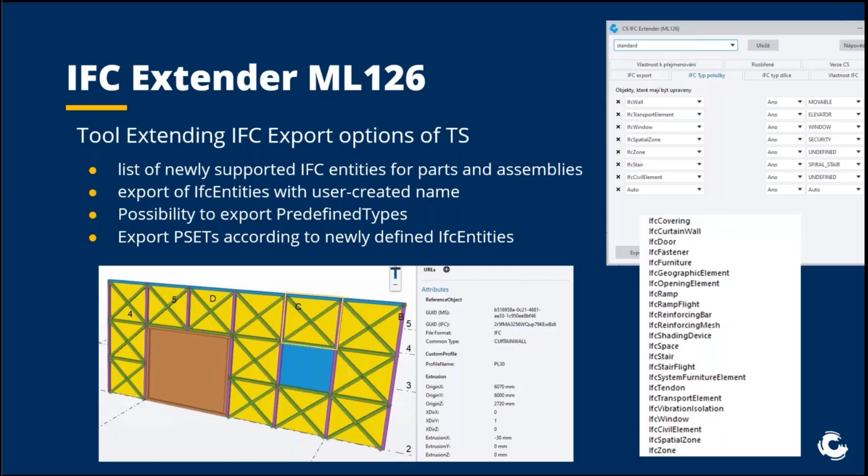In the second part of my presentation, I will show you three tools we made to help our customers with this, with BIM implementation. The first is IFC Extender ML126, which extends the current IFC export of Tekla Structures. It offers a list of newly supported IFC entities for parts and assemblies, beyond the list already offered by Tekla. It offers the possibility to export predefined types, exporting property sets according to newly defined IFC entities, and so on. I'll show you in a second.

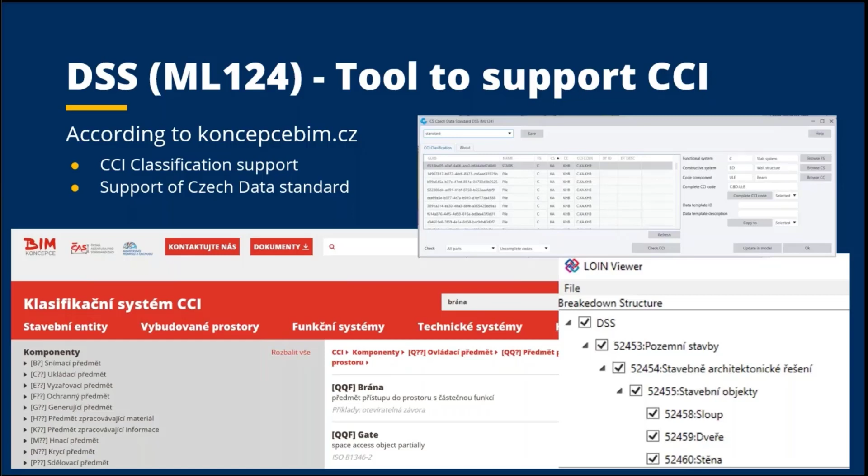The second tool is DSS, a tool originally made for the Czech market, but because it's made based on an easily editable Excel file coming from CCI classification, it's easy to adapt for different countries using CCI classification as well. This tool helps the automation process in filling in CCI codes. It whispers the codes for you, so you don't need to remember all of them, and it checks if all the objects in the model are classified.

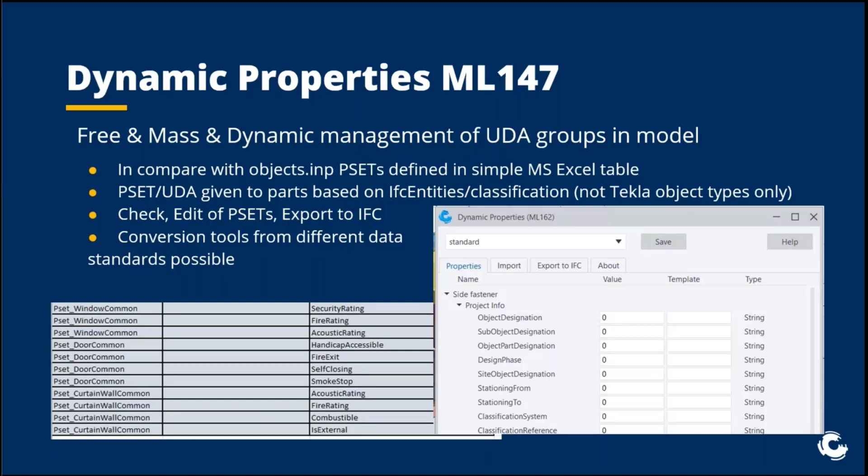The last tool I will show you is Dynamic Properties ML147. It's really powerful if you like to freely and massively work or handle dynamic properties in UDA in the Tekla model, compared to objects.inp as Tekla users know it. This is really dynamic and flexible, and you can easily set up your data standard in a Microsoft Excel table, or create a link from any data standard on the market to your Excel file, and then use it in Tekla Structures. You can even categorize your entities in the Tekla model, not based only on Tekla model objects like beam, column, panel, and so on, but using whatever number of categories you like and your format requires. Then you can again check, edit, and export this data to IFC and extend your model. I'll show you this now live in Tekla Structures.

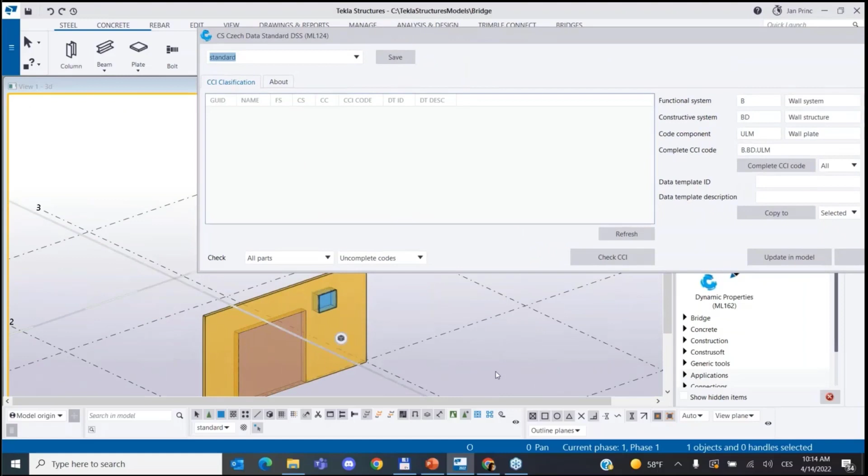Starting with CCI classification, Czech data standard. You see I have a simple model just for this presentation. In this model there is a simple bridge and a simple wall. I will start the Czech data standard tool, check for all CCI codes, and you see I have plenty of objects in there, just three of them are classified.

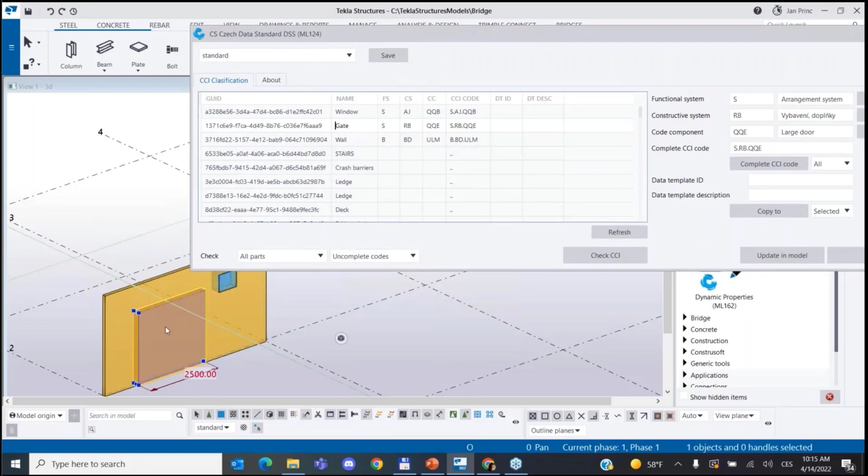These are the 3 objects: the door, window, and the wall. I can highlight any of the objects, check if it's really the object I'd like to show, and then I can fill in the CCI code.

The CCI code consists of functional system, constructive system, and code component. Here is the complete CCI code of the component. If I'm not satisfied with the code, I can browse for it.

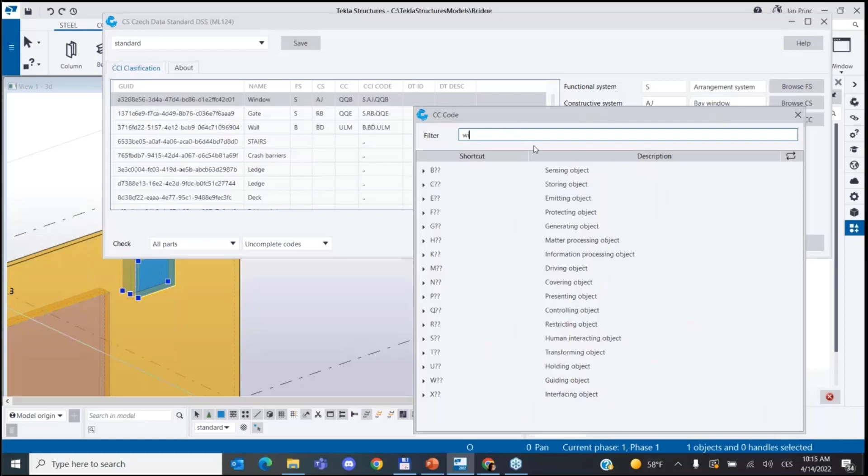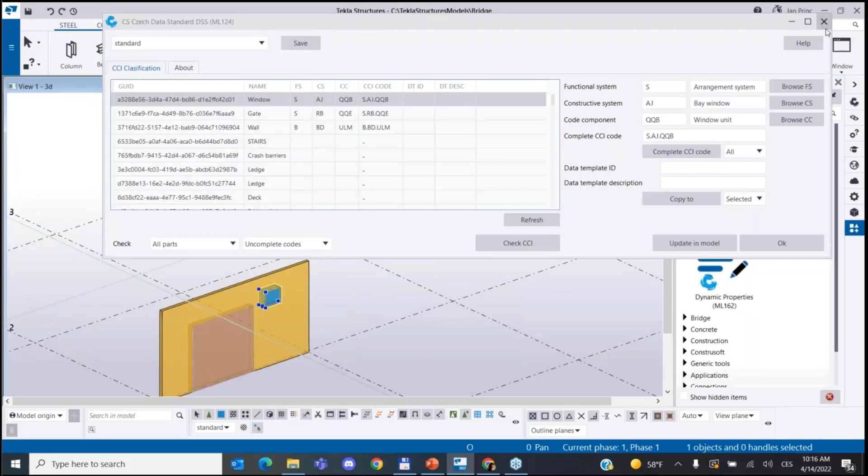I can filter by writing the first 3 letters and choose from the list which window I'd like to put in. Then I can complete the CCI code, copy it to selected objects, update in model, and the model is updated. Later, I can check only for uncompleted codes, see what's not filled in, and make it ready for finalizing your model.

When my model is classified, I can use IFC extender. IFC extender looks similar to IFC export, but there are a lot of new functions helping with the IFC export, making your exported model even more rich.

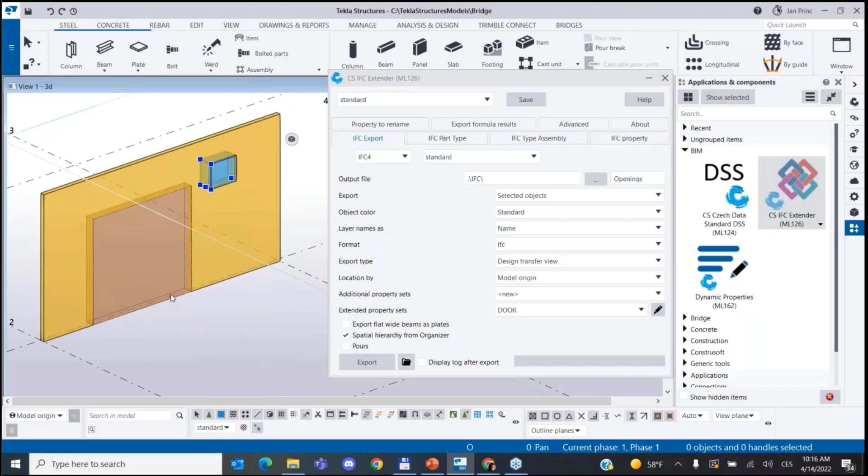The most important thing is that you can define your IFC entity and subtype. You have it in Tekla 2022, you have it here now, but we have our own categorization here. So here you can select that this is in fact a wall object of Tekla Structures, but we like to export it as IFC door with subtype or predefined type gate.

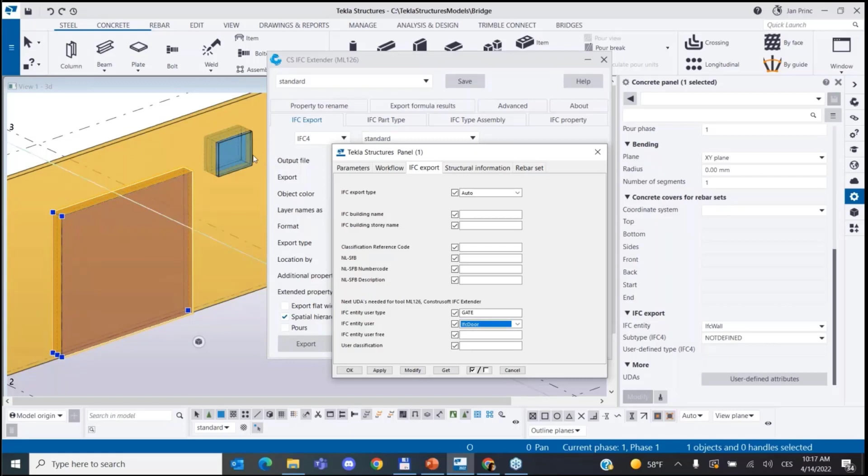And here we have a window, which I've, just for the case of this presentation, created as a user-defined entity, so it will be exported as an object with this IFC entity - so it's IFC window. The same thing you can do for assemblies and so on.

These extra IFC entities you can extend with extended property sets. So I will export for IFC door and IFC window. I will export the CCI code and other opening properties just for this presentation.

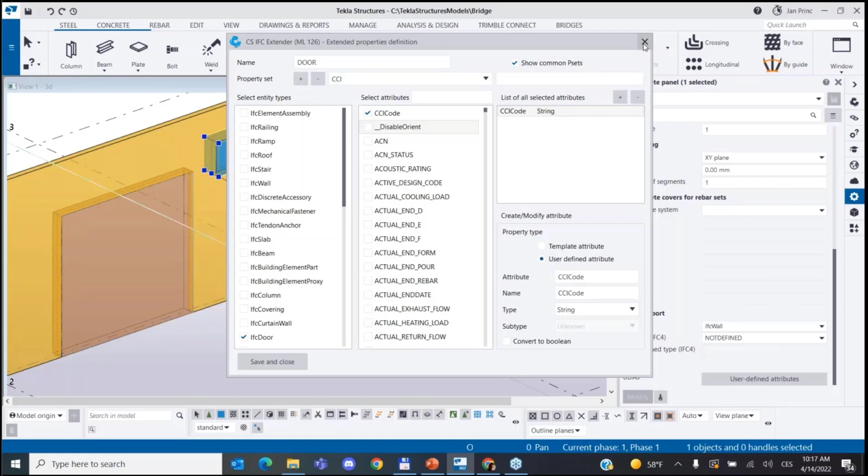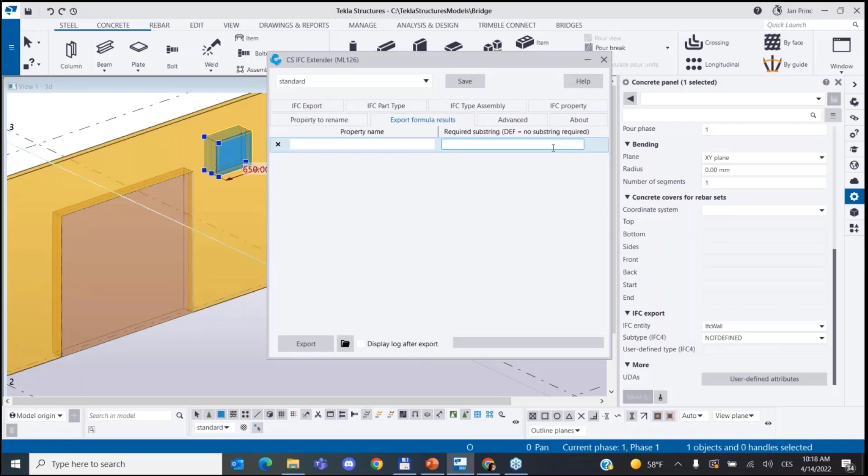In IFC extender, if I'd like to, I could define predefined types for different objects, or export IFC properties as a result of a formula, like you know from template editor. So if I go to IFC export, I will just select these 3 and export them.

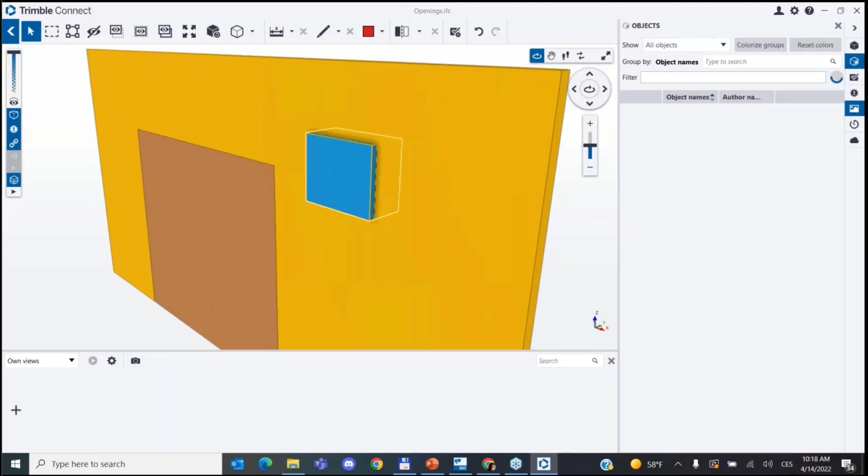Check for the file in Trimble Connect. And in there, you shall see that it's IFC window type, not defined subtype, and I have exported the CCI code as we defined in the model.

And a special property set for openings, and the same in case of IFC door type, which is subtype gate.

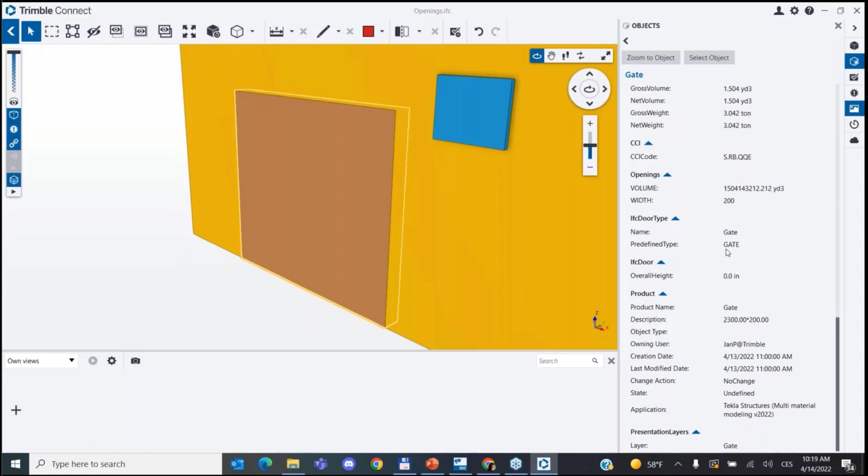If I go back to Tekla Structures, I will show you the last tool I'd like to show you today, and that's dynamic properties. Dynamic properties is based on a simple Excel file, as I mentioned before.

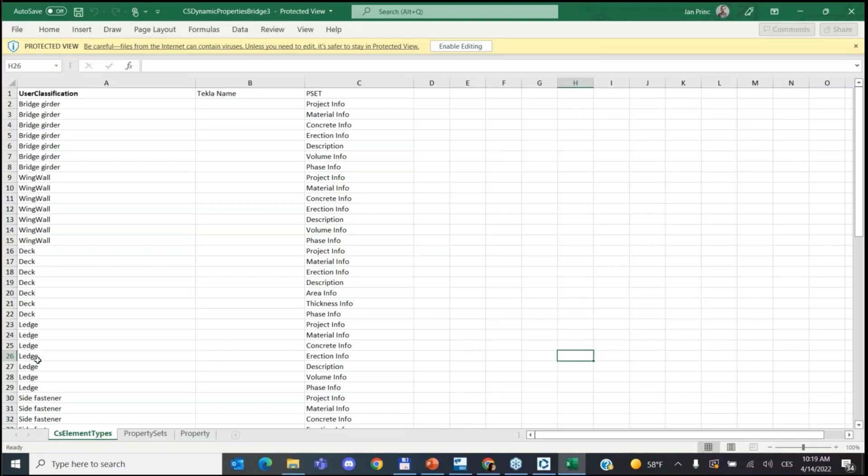I'll just show you for a second. It's an Excel file consisting of 3 sheets: element types, property sets, and properties. So here I have all the element types and the property sets linked to them. Here, for each property set, I have the list of all properties.

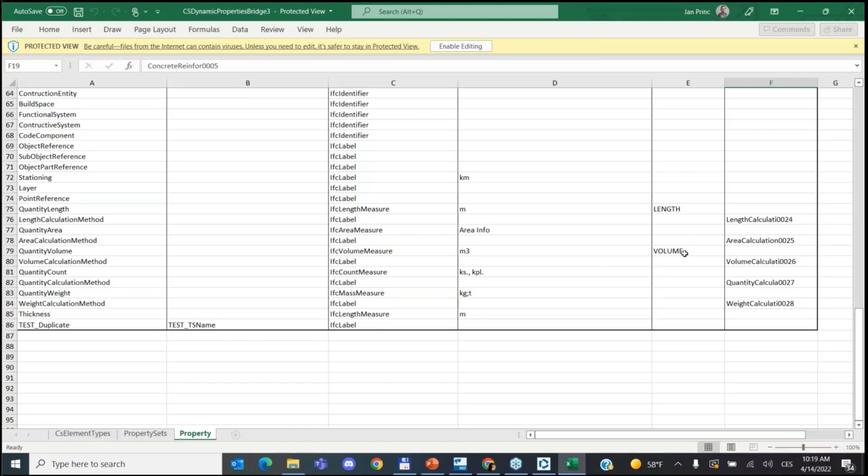I have the list of properties and their types and subtypes, and even - there are only 2 here, but in practice most of the properties will be filled automatically based on the result of formulas, like you know from template editor. So you don't need to fill in all the values manually. That's the plan, that's how the tool should help.

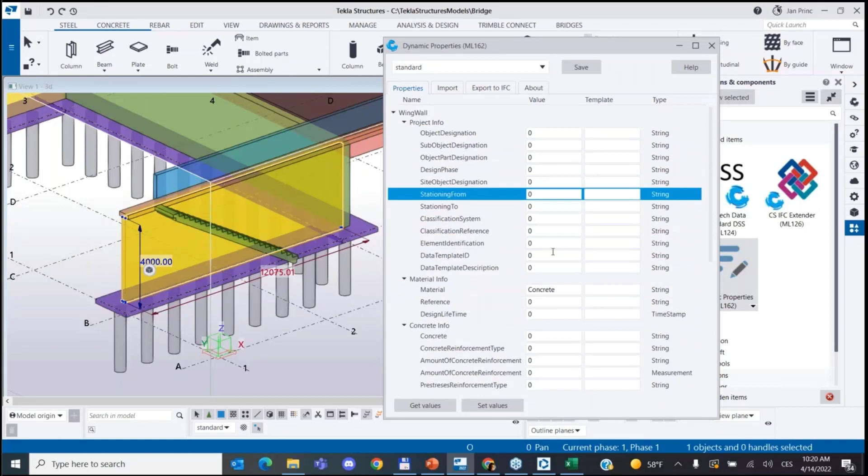So if I start dynamic properties, you can see I have here a column, but in my categorization it's a pile, so it has these UDAs offered to the user. Here I have a wall, and this wall is categorized as wing wall, so it has these UDAs, and there's another wall which is categorized as crash barrier, so it has again different UDAs.

I can fill in these UDAs for more objects at once, set these UDAs, it's written to the model, and then I can export these values to IFC.

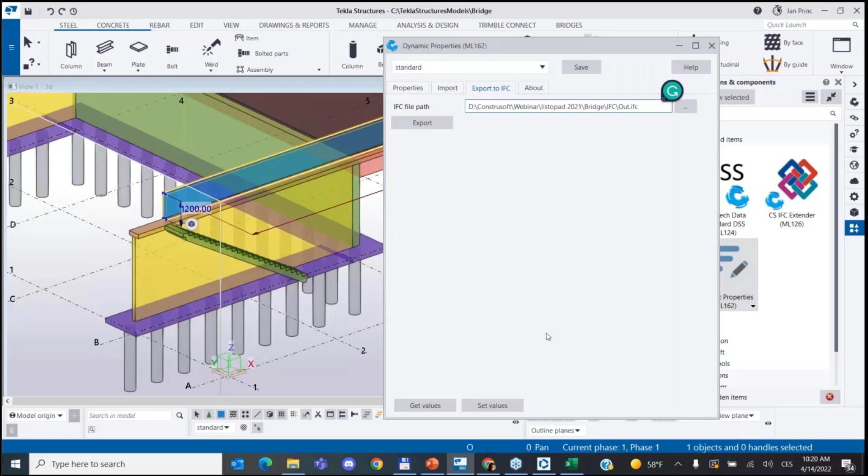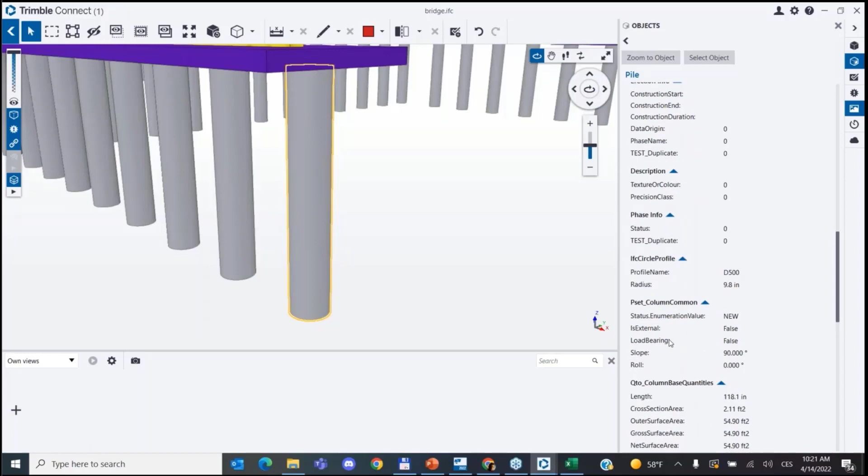And if I go to the model, just briefly show you as the last part of my presentation - you can see that in the pile there are all the special property sets created by dynamic properties written, so it can be used by the user.

So that's it from my presentation. That's what we made for our customers to handle BIM standards, classification, and IFC export - don't be scared of this. Thank you very much for having me here, and good luck with BIM.